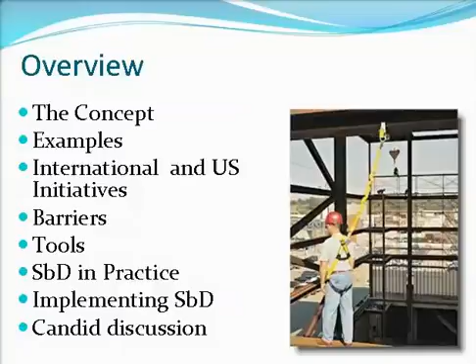I'm going to just go through quickly our concept and some examples so you know kind of what it's about. I'll tell you what's happening internationally and in the U.S. since about 1994. Again, talk about some barriers - why is this thing happening so slowly if it's such a good idea? Talk about some tools that you'll see, and again, how you might be able to implement. I want to leave about 15 minutes for us to have some good conversation at the end.

The process - what is this safety by design? I started calling it a long time ago designing for construction safety. In a minute I'll tell you the difference, but you might have heard of prevention through design. Safety by design is very simple - it's getting designers, engineers, structural engineers, other types of engineers, architects, to think about the safety of construction workers during the design.

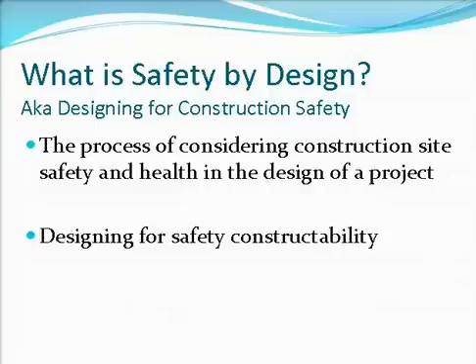So right now when we say constructability, everybody agrees constructability is a good thing. So we design for it - it means you can design it or build it fast, you can build in quality, it's cost effective. What we're saying is let's get safety in there too. So some people say 'I'm already doing it,' but many design professionals are not doing it.

NIOSH, the National Institute for Occupational Safety and Health, that's not part of OSHA. OSHA is enforcement. NIOSH is a government entity within the Center for Disease Control and the National Institute of Health. They are doing research on construction, so they have a broader term.

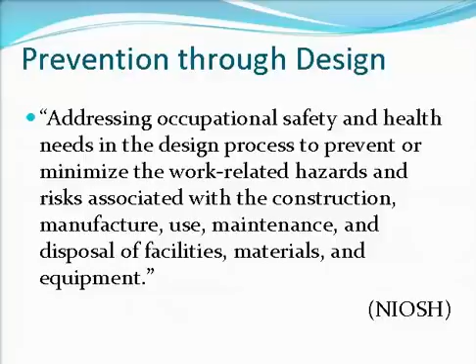I just want to point out some things. Again, it's the design process, that's when it happens. But look what they've done - not only the construction, but the manufacture, use, maintenance, and disposal. So they're really looking at the whole life cycle. It's the same idea, getting designers to think about more things than they're currently thinking.

What safety by design is not: one, saying that design engineers or architects need to take a role in site safety during construction. We absolutely do not want that risk, and frankly there's not a lot they should be doing during that time. So that's not what we're saying - we're not trying to make them responsible. We're also not saying that we should have legislation.

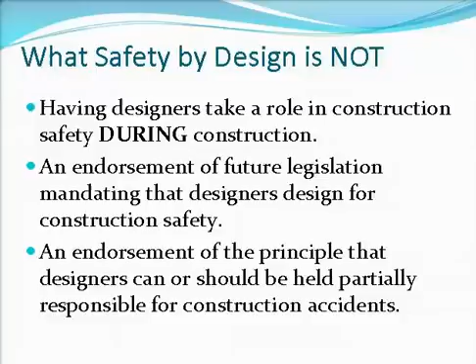Some of you may have seen this before. Actually, can I just do very quickly, get a sense who I'm talking to and what your interest might be? Who here are educators somehow, in one way or another? Great. Who here are structural engineers or any type of other designers? Oh, you are a brave soul, I love you. And secondly, who are fabricators, erectors, and others? Okay, great, well thank you all. It's a wonderful mix of people because everybody can play a role in this.

I'm not sure if you've seen this before. It applies to a lot of things, not just safety. So as we go on through the schedule, we're just saying our ability to influence goes down as we go from conceptual design through to startup. And here it's the ability to influence safety, but it could be influence quality, cost, etc. But this is just the concept that's driving this - the idea that the more you think about it early in the process, it's going to make a difference. And it's a great idea, we'll talk more about that.

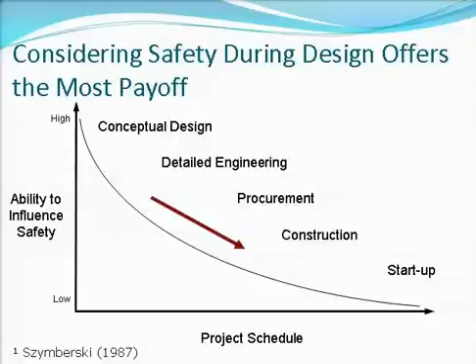But here there has, in fact, been some research. Mike Behm, who's a professor at East Carolina University, did some research for his doctoral work showing, again, a link - 22%. We've also got 42% of some fatalities in the U.S. around was somehow linked to design. And then Europe also did a study.

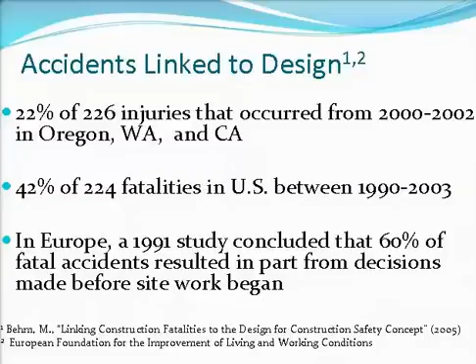These studies do not say that these engineers caused these fatalities or caused that accident. What it says is the design may have contributed - there's always many circumstances, many factors involved. Or had the design been a little bit different, then this accident might have been prevented. But we're nowhere saying that these engineers caused these accidents. There is research that says this stuff can work - thinking about safety might be able to prevent some injuries.

For those of you who are engineers, you may or may not be a member of the NSPE. I'm a PE, but I'm not a member because I don't feel like paying the bills, but I know it's a good organization, NSPE. They have the Code of Ethics. My organization, the American Society of Civil Engineers, has the same sort of thing - that engineers shall hold paramount the safety, health, and welfare of the public.

What is the public? Who is the public? Someone pointed out to me the other day, sent me a link - NSPE's link in 1947, their Code of Ethics, specifically said we have a duty not only to the general public, but to the folks who are working for us on the job site. They took that out - some attorneys said, oh no, that's too dangerous. So what we have today is just this general public. The AIA, the American Institute of Architects, say specifically this does not refer to construction workers. I personally, as a professional engineer, I think it does. But that's something we can argue about.

My organization, the American Society of Civil Engineers, says specifically under their first canon that engineers should recognize that the lives, safety, health, and welfare of the general public are dependent upon engineering decisions. So we recognize that safety is part of it. My friend and colleague Ted Shepard is on a committee with me within the ASCE. We have a site safety policy that also puts this there and says this is an important part of it. But still, how we interpret it, how we implement it is a different thing. We think there are code of ethics reasons for doing this.

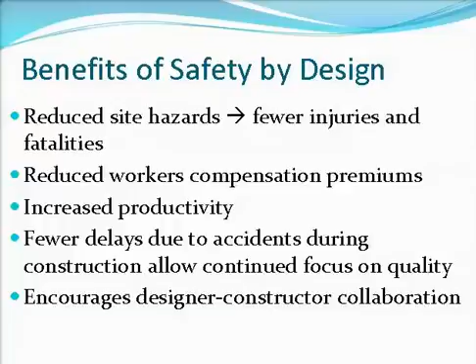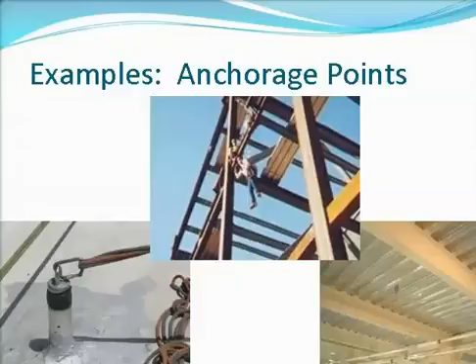Some quick examples, you've probably heard of this before. Some people think this is the low-hanging fruit - the idea that anytime you're putting up a building, you can design the built-in fall protection, the anchorage systems, right? Because the structural engineer, that's a slam dunk for him or her. Very easy to do, they can do it quickly. For other folks, they can do it, but it takes longer, so they're not quite as familiar with the project. This one, you probably see that's a rooftop. That's not only great for fall protection during construction, but for window washing and other things for maintenance. So this we think is a good one that should be done. It will facilitate construction safety, and it'll also help with maintenance down the road.

Some other examples, very specific to steel, is the whole idea of prefabrication - taking work from the site, maybe particularly work that's usually done at elevation where you need fall protection, and moving it down to ground, or better yet, moving it off-site. Let the factory do it, where we've got machines, we've got automated equipment to do that.

Anytime we can prefabricate, not only is it often going to save money and save time, it's actually a lot safer too. For example, bridge trusses, roof trusses, and even pre-engineered buildings. Now, I'm not trying to take work away from the trades, but to the extent they could get away from some unsafe activities, they'll be happy to move on to other projects.

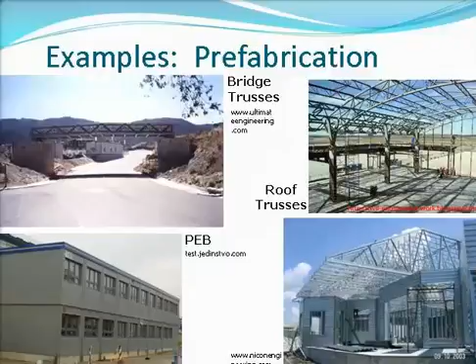So prefabrication is a good example as well. This has been done for a while.

In 1995, the United Kingdom started to pass these laws called the CDM. Who's heard of that before? I knew Europe had some. It got implemented in 1994-95. Frankly, it hasn't worked that well, there's been all kinds of problems. They've tried to learn from it, and they revised it again in 2007 with brand new legislation.

Then the European Union jumped on board with very similar legislation. Now designers have to identify hazards on their plans, and they also have to try and minimize those hazards during their design.

Again, some great ideas. I have a problem with it because it's legislated and mandated, and it was required before they even thought about how the industry really works. So there's been all kinds of problems, but hopefully they're getting it fixed. In the meantime, it is required over there.

Australia is doing it more the way I'd like to see the US do it. They have their kind of OSHA, and their Department of Labor folks have some great resources. There's a website for you, and I'm going to leave my business cards down here.

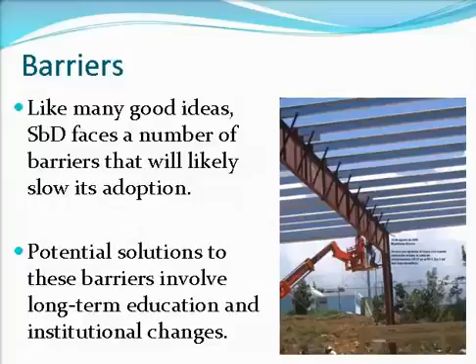My kids are in high school. I kind of doubt we're going to see a lot of this design-for-safety while they're still alive, much less me, but maybe I'm wrong. We'll see. So this liability, there's no doubt, is the 800-pound gorilla in the room.

You just can't get around it. It's unfortunate, but that's the world, that's the U.S. anyway. I don't have any problems with attorneys, I have them in the family, but let's face it, their job is sometimes to make owners and others pay for unfortunate things that happen.

What we are saying is we do not want this, what ASCE is doing, the fact that we even have this Prevention Through Design Committee, anything we may change about the way the industry goes, to give fodder to attorneys to sue us later on. So we're not suggesting that designers should be sued, absolutely not. But we do think designers should do this on a voluntary basis.

Right now everybody's familiar with the EJCDC, the Engineers Joint Contract Document Committee general conditions, or maybe the AIA A201 for architects, or maybe AGC. Everybody knows those model conditions.

What we're saying is let's modify them a bit, not to break down that firewall between designers and safety. We're just trying to say let them do it on a voluntary basis and make it very clear that what they do during design has nothing to do with what goes on during construction.

Some of my colleagues on ASCE were just furious that I would suggest we revise the EJCDC documents. I'm just saying, you know, chill out a little bit, open up your ears, and talk about what could be done to help the profession, not to hurt it. So that's still a point of contention.

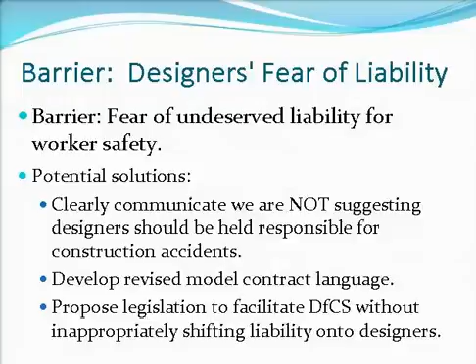Again, I suggest legislation kind of like Good Samaritan legislation, the idea that we could do this on a voluntary basis without incurring a lot of risk. Some things I've suggested have been misunderstood and really rejected, but I think there are some things we need to continue to talk about. Yes, we'll have to get attorneys involved to help us flesh that out, but eventually we'll get there.

Second big barrier is costs, there's no doubt about it. Just like we heard in the connection session prior to this, which I very much enjoyed, there's going to be extra costs associated with having designers think about safety, and it's going to take time. We're going to have to train them all, we'll talk about that in a second. There might be some overhead costs, some checkers or quality control for safety. It's just going to take more time for designers to be doing this.

I think the solution is what you all think about already: avoid the owners who just want the lowest possible cost right now, versus educating them about the whole life cycle, the idea that if you spend a little more, spend $1 now in design fees, I'm going to save you $10 during construction and get your project done faster. So the more we can get smarter, educated owners, that's really going to help, especially owners who have an owner-controlled insurance program, the OCIP, which really makes sense for them.

But it takes a certain savvy owner, and no offense, but sometimes owners in the commercial building market only look at what it can cost them right now. So we've got to think about it, we've got to address this cost issue, but again, I think we can get there.

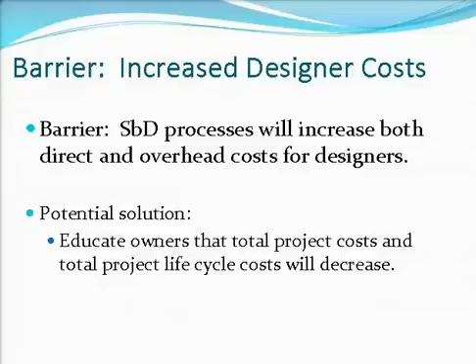Last barrier to talk about is this idea of whether designers are even capable of designing for safety. I have to say, again, I'm a civil engineer, I went through undergraduate and graduate school, and I didn't hear about safety. I don't know how many of you did either, but you probably didn't hear much about safety at all, just maybe a smidgen if anything. We recognize that, so one of the things we want to do is add safety to design professionals' curriculum.

So I teach at a primarily undergraduate university. We only teach civil engineering. We don't have construction - I mean, I teach one course in it, but it's civil engineers. Do we have room in our curriculum for safety? Heck no. I don't even have enough time for construction issues. So it's a fight there.

I'm not sure if you're aware of it, but there's a policy by ASCE, adopted by many states, that you're not going to be able to get licensed after 2015 without 30 hours extra of education. In other words, the bachelor's alone won't cut it anymore. Not sure if you're aware of that, 2015. So maybe once that goes into effect, we add a 5th year to a bachelor's or a master's, maybe we can start adding that in.

For those who are not students now, who are like me, out way past the undergrad days, we start developing a 30-hour course now, or maybe a 10-hour course on design that focuses on designing for safety. So that's what we're thinking about down the road, educating them.

But probably the most important thing is that third one, the tools. We've got to equip designers with some kind of tools to help them know what they're doing. So there's some things out there now. We're not there yet, but let me just tell you a little about that.

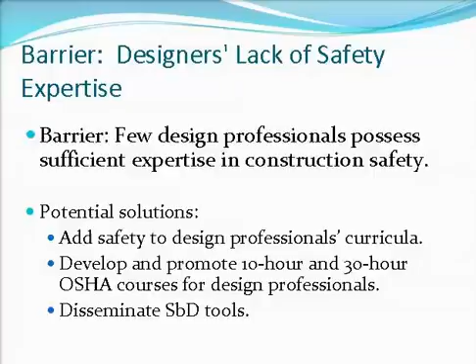This is something that CII, Construction Industry Institute, they're out of Austin, Texas. Big owners, big contractors put in a bunch of money into this consortium and hire a bunch of good research, kind of like AISC. And so the CII developed this thing actually 10 years ago. Jimmie Hinze did it down in Florida, and it's a program.

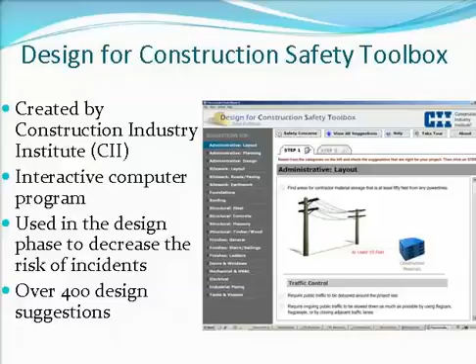So for each trade - I know you can't see that, this is just a screenshot - but for each phase of construction, it gives you a checklist. I think there's like 457 altogether, something like that. So this is a start. It's not perfect, it's getting better. They're coming up with a new one. Unfortunately, you have to pay for this, so that might be a turnoff for some folks. But it's getting there, and I think it will be a tool.

A lot of firms have checklists. And so I told you about that one, the CII tool. Other firms have just the checklists alone. So again, what you do is, for example, structural framing, and it just goes through - are you thinking about this, are you thinking about that? And that's helpful, so checklists are a good thing. Again, not a lot out there. Most of them, I don't know if they're proprietary, but they've been developed by specific firms for their specific things.

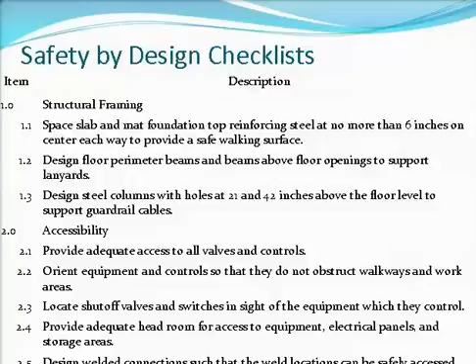This is a website, actually, that I run. I had it up for about 2 years. It's called designforconstructionsafety.org. I don't know if anybody's ever seen there or gone there. If you have, it may look different because I just redesigned it, tried to make it a little snazzy. The student was telling me it looked too boring and out of date. So we updated it a little bit.

The neat thing is, again, I can track this. I don't know if you know about Google Analytics, but you can see who looks at your website, and it's all over the world that people are looking at this whole initiative. I think people want to see what U.S. is doing, and they already know what's being done in Europe and Australia. So this is a worldwide thing, and we're just a little bit behind in the U.S.

On my website is some other links. For example, if you want to learn more about the Construction Alliance Roundtable, there's a link there, NIOSH. And then I take you actually to places around the world, UK and Australia and others that have some helpful tools for you. So, for example, here is something from the CDM - remember I said that, Construction Design and Management, that's the UK's - and they have about 20, 30 of these sheets. This one happens to be for roofing.

Just trying to say, all right, you're a designer, designing a roof, or an architect or engineer or whatever. What safety type things should you be thinking about? What specific safety decisions can you make?

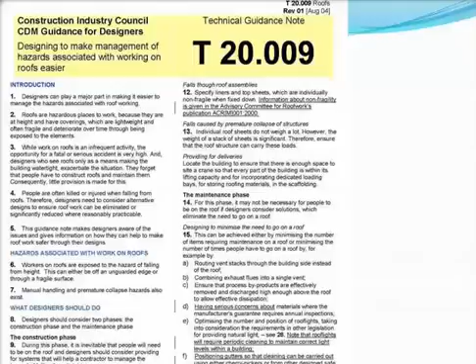You may not realize, but the steel industry is the poster child for this whole thing. And you say, what? I hardly even heard of it. Well, that's because of what Barry mentioned. The National Institute for Steel Detailing and the Steel Erectors Association of America have put together what I think is a fantastic manual. I'm not getting paid for this, but I'm going to point to Jim Larson, who's worked hard on it. What room are you going to be in, Jim, after this?

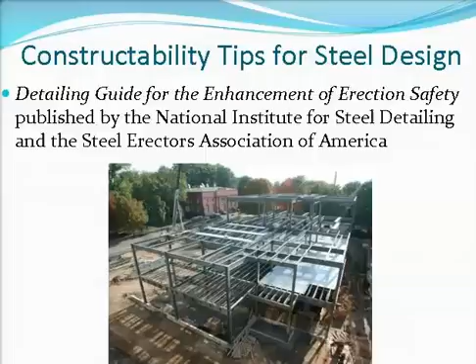121C, 4:15, I think it starts. I highly encourage you to go there. I'm going to be there. You'll see more of this. But what they've done is they've gotten the field erection people, who know about safety, who know about productivity, etc., to put together in a book a whole bunch of great images just to educate the engineers. And so if you're a structural engineer designing in steel and you don't own a copy of this, I hate to say it, but you don't have an excuse anymore. Because this is out there for you to educate yourself.

It's probably, I think the first version I've seen was maybe 40 pages. Has it grown or not? About another 15 pages. But really common sense things, and not hard, and in very few cases is it ever going to cost even a penny more.

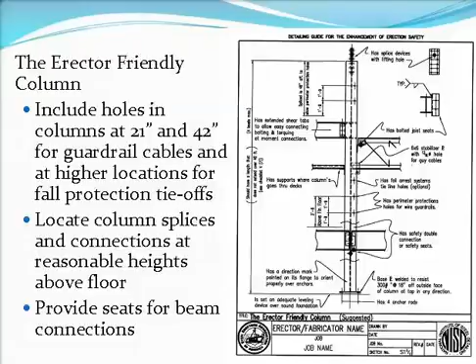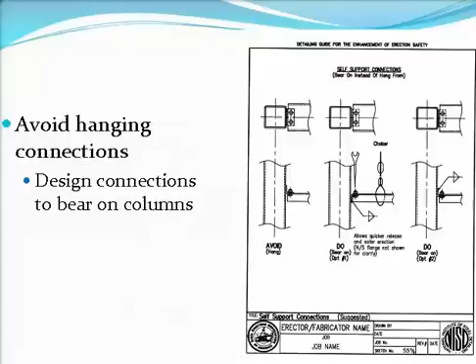So real good insights, just about where the columns should be and holes for the cables. You say, well, I know about that sort of thing. Well, how about avoiding hanging connections so they can bear on there, and therefore you're not putting an iron worker as much at risk while he's putting in those 2 bolts at least. So things like that, the idea of sharp corners, chamfering back so people aren't hurt by that. Also some awkward connections, make sure there's enough space to get in there with your torque wrench or whatever. Just a lot of common sense things.

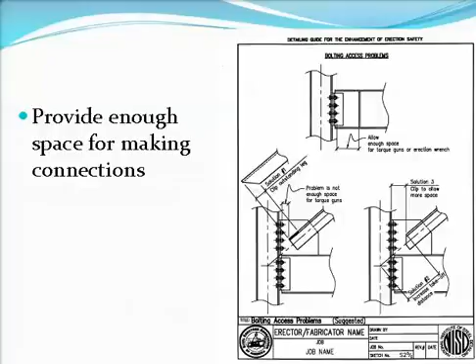In fact, here's a great page here. This is all the tools that iron workers, steel workers use to do their work and what their clearance is and things like that. And so it doesn't take a lot of time to study this, and yet I think it'll make you a better designer. At the least, you'll save somebody from busting their knuckles as much, and who knows, honestly, you might even save a life or two by learning this book.

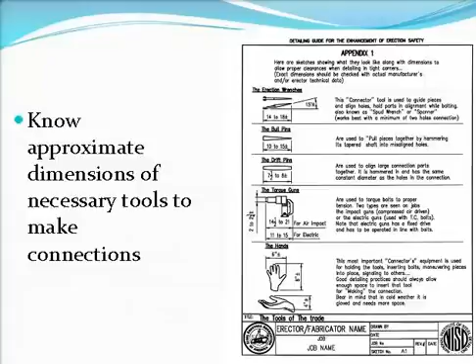So again, I commend the industry for having this, and it's the industry that I get most excited about. I talk about this with the electrical industry and concrete and other things, but steel is ahead of the curve. You're still not quite there yet, frankly, and Jim will probably talk about that, but it's moving forward. You got the tool to do that.

So that's a good thing. Again, this is not just a great idea. There are folks who are doing it, and particularly design builders. Why design builders? Because, remember, OSHA says you, the employer, have to have responsibility for your employees. That doesn't apply to design engineers when they're just doing design. But if you're a design builder, now those folks in the field, those construction professionals, are my coworkers. They are my employees. And if I can save their lives and reduce my workers' comp, I'm going to make my company more money and add my bonus. So design builders have a lot of incentive to do that.

And so the URS, Washington Group, now recently bought by URS, has been doing this for a long time. And they've really led the way in their training and other things. Brad Giles, I don't know if you know him, but he's a great guy. He and I have collaborated a lot, given presentations, and I've learned a lot from him. So they are one of the leaders. Jacobs is doing it too. Again, they're driven. They're a firm who does a lot of work in Europe, so they have to do it over there.

So they're bringing it over here slowly, because they're still getting a little resistance, but they're making it happen in the U.S.

Same with Parsons. In fact, the CEO of Parsons has said he wants safety to be, we want to be the safety leader. We see that their mod factors and incidence rates are already incredibly low, and yet they need to take that extra step. The CEO says the only way we're going to be able to do it is if you start thinking about design for safety. So they're starting to move on that.

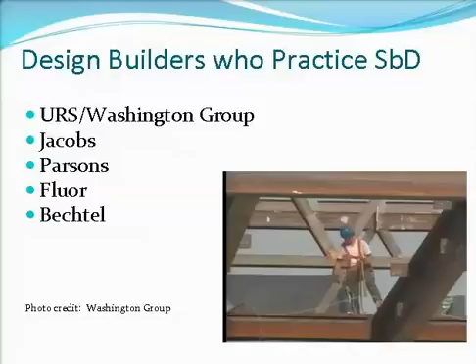Fluor is another big process firm doing this. And then the last one, Bechtel - I have a couple colleagues in the audience who've come, and they've been doing this for a while too. Let me just jump ahead.

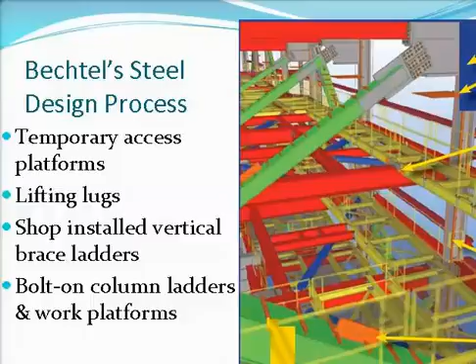But Bechtel is really moving forward on some things. Remember how we heard in that connection design presentation, some structural engineers want it for control? I think that's Bechtel's philosophy, and they can speak afterwards. But all kinds of neat things are represented in this simulation, this drawing, this solid model.

Let me just show some pictures of it. I thank Martin, who I think we'll hear from during Q&A, for sending me these pictures from Bechtel. So the idea of temporary platforms - that'll make the work easier - lifting points, lifelines in there are part of their process. The idea of modular platforms.

If we know these are going to be good work platforms, let's prefabricate them on the ground. Remember how we talked about that? Don't do it in the air, prefabricate it on the ground. We'll save a lot of money if they make them more uniform for procurement, installation, and the learning curve, etc. So here they're prefabricated on stage, then we put them on site, and that makes their work safer too. That's an example of a couple of those principles of design for safety by design.

The last one to show you is some lifting clips, and then the rungs to climb up. So make it easier - right from the beginning, how can we make erection easier and faster and safer by things we do during our design and detailing? So I commend Bechtel for what they're doing, and thanks for those photos, because it shows what can be done.

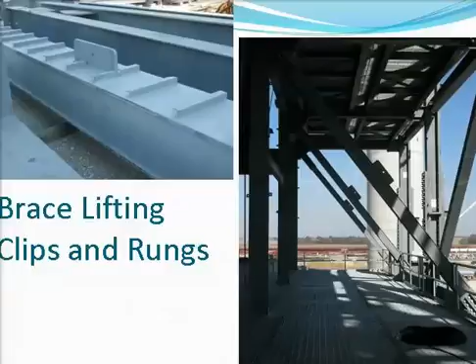Some of those other firms are doing similar type work as well. It's not just design builders - owners are doing it too. The Southern Company, I don't know if you've heard of them, big power manufacturer. They own their power plants, they design and build them themselves. Actually, they often get help with the build, but they often design them.

Headquartered in Birmingham, Alabama, I was asked to go down there with a colleague and review their design for safety program, so I'm pretty familiar with it. They're doing some neat things, and I'll show you one of their checklists in a second. Intel, I think we've heard of them - a nice owner, very progressive. They've implemented this well, saved them money, and they're happy with it. They're not doing it on every project, but they're doing it on some.

Harvard University - you say, well, what's up with that? They actually just got some very progressive facilities management people. Two weeks ago I was at Harvard participating in a course - a week-long course for folks like you, design professionals, construction professionals. There were a lot of big owners in the audience, and they took this continuing education course on design for safety. I was honored to participate in that a little bit.

Brad Giles from Washington Group was also there. So they're moving forward on this. They've gotten a little resistance on making it happen on every project, but you'll hear more about that. And then the last one - sorry I cut it off - but the Army Corps of Engineers is moving towards trying to get anchorage systems required in their projects. So you'll hear more about that.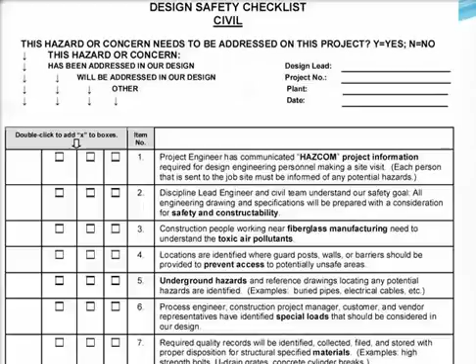And then the other part of it was collaboration. The construction folks have to be involved in these meetings and filling out these checklists. So that's an important part as well.

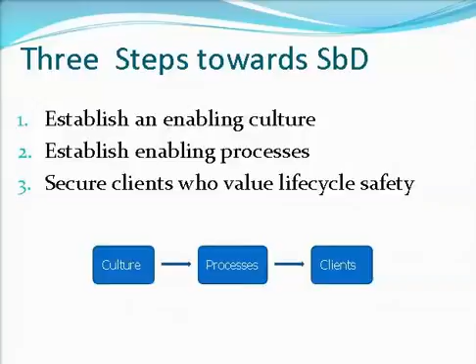I'm bringing this towards a close, and for those of you thinking, alright, now what do I do with this? Sounds like a great idea, but there's these barriers. If I want to do something today, I leave here and the boss says, what'd you hear, what'd you see, what can you do? Well, I just want to throw out my thoughts on some very specific steps you can do right now.

It has to do with culture, processes, and clients. It's got to start with culture, right? And it's not just cliche. Top management has to be committed from the beginning. Your values can be about customer satisfaction, but it better not be about making a buck, right? It ought to be about getting people home safely. So that culture, getting safety as a priority, is a big part.

Or if you're a design firm, the idea is we're going to design for safety and constructability, not just cost and time. So you've got to get that management commitment. Maybe your designers are motivated by the code of ethics, maybe you hang that up on the wall to remind them. Or maybe your folks are bean counters who want payoff data, so you show that slide about how it helps workers' comp premiums. Get them motivated to follow it, whether it's ethical or the almighty dollar.

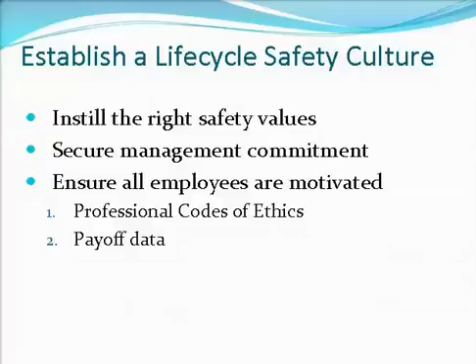Number two, you've got to get some processes - you're going to have to change some things. Remember, educate those designers about construction safety. They've probably not been exposed to it before, maybe a little bit. So make everybody do a 10-hour course. Washington Group has a 16-hour course, and they're happy to share that curriculum with anybody who wants to know what they train on.

Number two is get that kind of interaction - remember how I said Southern Company has the construction folks and designers talking? That's hard to do with a commercial building where it's design, bid, build, because you don't even know who the contractor is going to be. But to the extent you can do that, it's a very good thing.

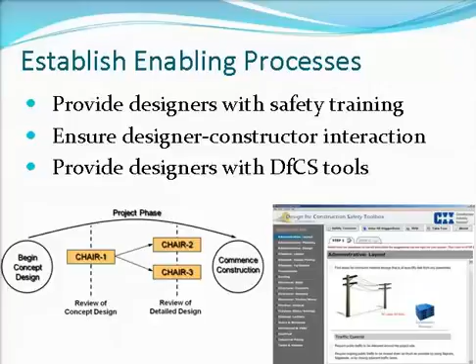And then finally, have some kind of tools. There's that CII tool I mentioned that you have to pay for, and here's the chair process - it's one of Australia's work products, and it's free, downloadable on the internet. So just some things to help you get that interaction, that flow of information from the field to design, maybe through a computer database, a checklist, or meetings. That's part of what you have to decide.

The last one is, to some extent, you could go start implementing this and you'll be beating your head against the wall if you've got the wrong clients. Because there are some clients who will not get it, who will not pay for it, and won't give you the time to do it. And you've got to decide.

You hate to walk away from bread and butter, but wouldn't it be nice to educate those clients and get the ones you want? So typically, folks who are hiring design builders, process folks, maybe infrastructure folks - you don't even need the client for that, because you're motivated to do it. Whatever you do during design is going to help your folks in the field.

But for other folks, internationally, when I talked to Jacobs and asked what's going on out there, he said, you know what, we are mandated to do it now. The UK makes it mandated in our process, and Middle East clients, some folks out there in the petroland, are saying you cannot bid - don't even give us a proposal unless you can show us how you've got prevention through design or design for construction safety in your organization right now. So you'll see more of that internationally, particularly on the industrial side.

That process market tends to be a little more savvy about safety. And anytime you can sit down with your client and educate them, you can have dialogue so they start thinking about life cycle costing, that's going to make sense. When it's hard bid, they have no incentive to keep working with you, so it's hard to do that.

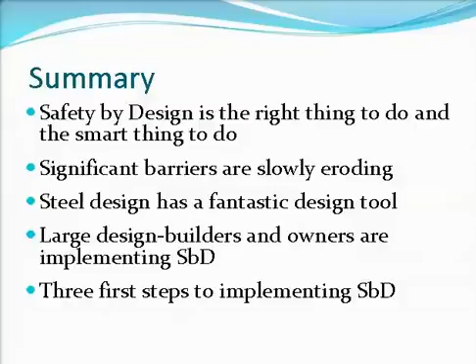Is this a great idea that's not going to work? Let us know, talk about it. Is the liability just too serious?

Should AISC have a policy? Right now they don't have any policy on this whatsoever. I had an article in Modern Steel Construction, so they're open to it a little bit, but I don't think they're ready to have a policy. So for those of you involved in this, tell me, should we try to initiate something on that?

And do you agree with me that most designers just don't know what they're doing yet on this, but hopefully they'll get there? Or maybe I'm wrong, maybe you have been exposed to more safety than I thought.

And then the last one: does it need to start with the owners? And if so, do they have an ethical obligation to actually start demanding it, even in all markets, even in the U.S.? So those are my thoughts for questions, but we can address whatever you want.

If I may, let's see, just to see, Martin, any comment you want to throw out, or Jim? I know you have to go get ready for your presentation. Anything you want to say quickly before we open it up?

We've gotten over the fear of speaking to our competitors. We always have a bid day, usually the day before or the day after the bid day, where a competitor has something, right? Particularly in the steel erection industry, we were sort of forced to think about how we can develop safety ourselves, because if we weren't, it doesn't make any sense.